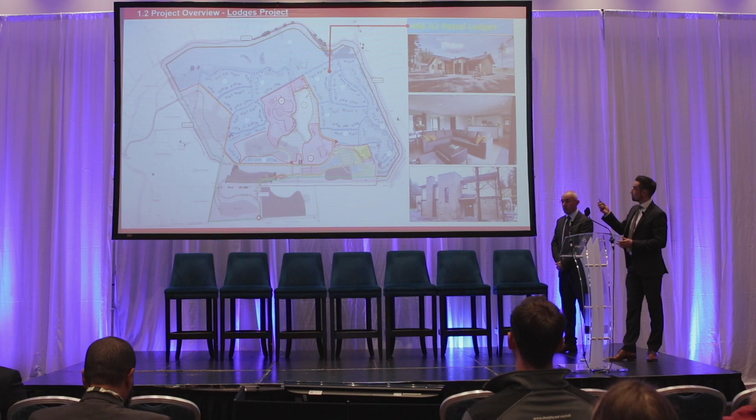First of all, the lodges project. As I said, there was 466 lodges, and lodges probably doesn't do them justice - they're high-end units, A2 rated, high spec, nice and spacious. There's a variety of different levels, from 2-bed woodlands right up to exclusives. On the right hand side shows some of the interior shots.

So in terms of numbers, what did this part of the project entail? There were 466 of them, a huge amount of materials to be delivered, huge amount of coordination in a woodland. You say 400 acres, you think there's a lot of space, but there was actually very little space inside because the wood was just pockets taken out for the building.

There was 300 kilometres of timber cladding, that's from here to London. There was 4.2 kilometres of lodges - if you were driving along in terrace housing, you'd be driving for 4.2 kilometres of housing. And this all had to be delivered in 68 weeks. There were 4,600 doors, 3,200 windows. So a massive amount of logistics and coordination needed.

Rate of production was 3 lodges per day, so each trade had to meet a very simple KPI of 3 of everything. For example, 3 timber frames had to go up, 3 lodges had to be roofed a day, 3 lodges had to have the mechanical and electrical fitted out a day. There was rapid production right through the job, like a cycle, and if that got knocked off, the project was going to be in serious trouble. So again, the digital side, the innovation, the informed decision making allowed us to meet those targets.

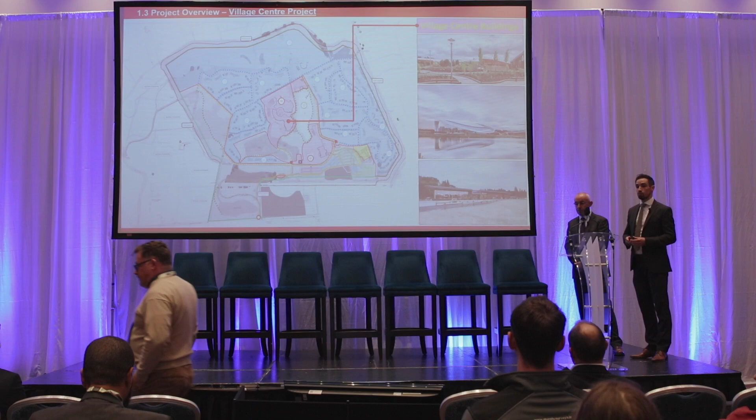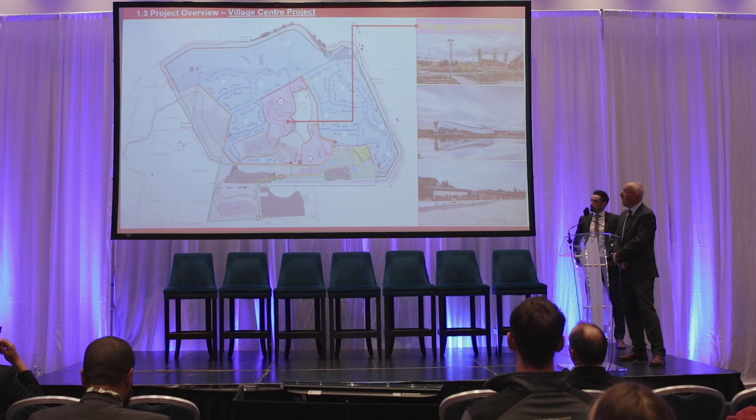In tandem with the lodges project that the lads were delivering, the other project we had was a village centre project. The village centre was 9 commercial buildings around the man-made lake that had been built in the middle there.

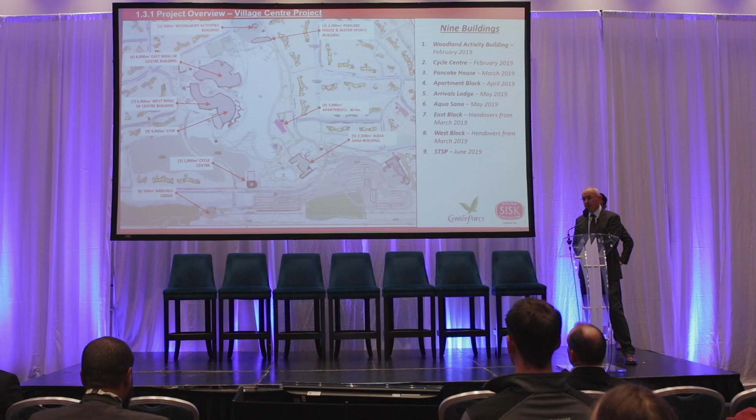Our site was much more condensed than the site that the lads had on the lodges. The lads were looking at maybe 200 acres of construction work right through the forest. We had about 30 acres concentrated around the lake, and 9 separate commercial buildings.

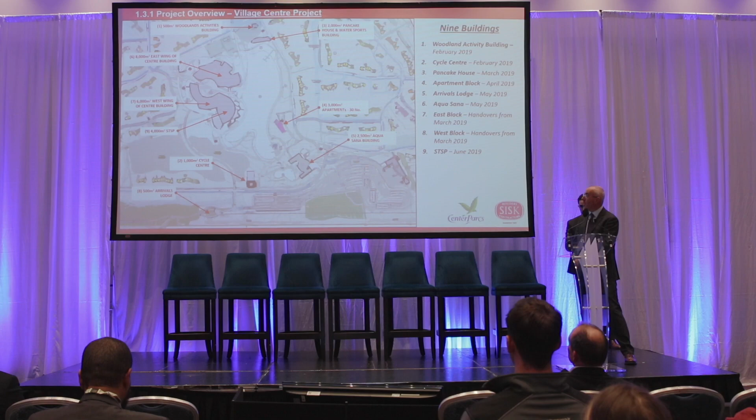2 at the top of the lake, the Woodland Activity Building and the Pancake House, an apartment block, and an Aqua Sana, which is 2,500 square metres of a health spa at the south of the lake, a cycle centre for 2,500 bikes, and then we had a village centre itself on the left of the lake - the east wing was 2 acres, the west wing was 1.5 acres, and behind the west wing was the subtropical swimming paradise.

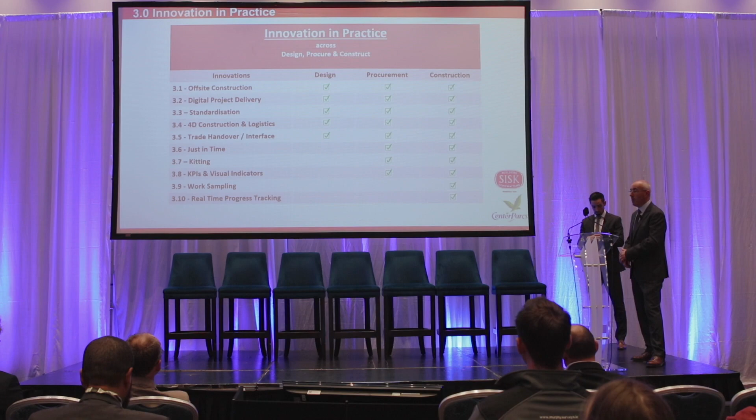Given the tight timescale and budget we had, we didn't have time to do things 3 or 4 or 5 times. They had to be done right the first time, and there was a huge amount of coordination needed. So I'll just hand over to Brian.

Okay, thanks James. So that gives you a feel for the challenge we had. At the start of the job, as I said, it was 2 projects. We had to first show ourselves that we could deliver 2 projects in 76 weeks, then demonstrate to the client that we could do it, and then actually deliver it.

There was a couple of stages, but it was a design and build project, so we had to make the client's concept design work in Ireland from a building regulation point of view. So we had to design, procure, and construct.

We used 10 summary items from a digital and innovation point of view, off-site construction being the first one. So what did we do from an off-site construction point of view?

This obviously has to start at design stage and right through to construction. There were 3 key things, and a lot of smaller elements, but these are the 3 key things we did. The subtropical swimming paradise, as James said, was a glulam structure, a large timber structure, but it had a lot of structural steel in the roof.

That was going to slow down the install, the procurement, and the off-site production. So we looked at innovative solutions: cross-laminated timber, coordinated with the glulam beams, fully modelled to be coordinated with all the services within the building. We delivered that, reduced 480 tonnes of steel, gave a saving to the client, and reduced time.

We did similar with the 466 lodges. They were all manufactured off-site in a warehouse in Derry, delivered to site in panels and trusses and erected. BIM allowed us to do that, so we were able to coordinate each of them prior to install on site. Once they came to site, it had to be like Lego blocks right through.

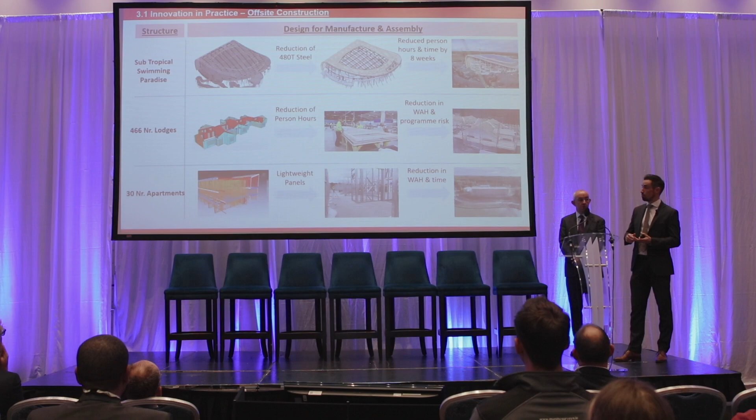Then the final part was the 30 apartments, a lightweight structural steel panel. Interestingly, since Center Parcs, we've actually acquired a company that now manufactures these off-site, Vision Built, here in Galway.

So it's a great new part of our business, and we delivered them 30 apartments using that system.

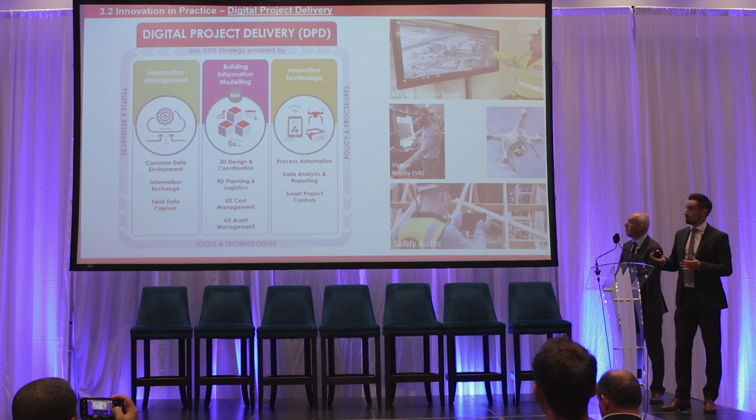The second part is obviously digital project delivery. People will be familiar with how SISK deliver in terms of our digital side of things. We have information management, building information modelling, and innovative technology.

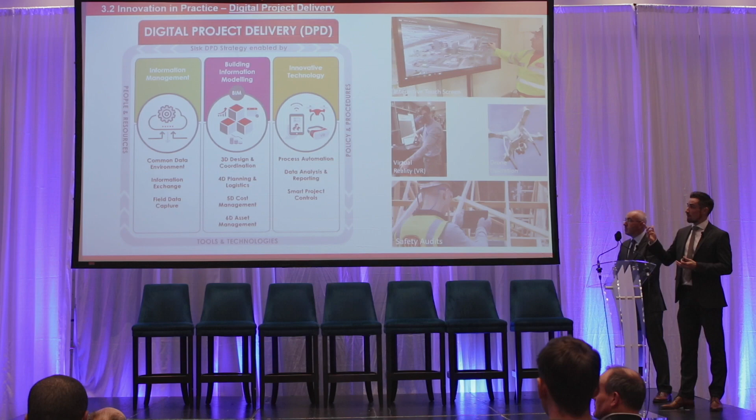These are the three strands we utilise to manage and coordinate our construction on site - the common data environment, the field capture tools that we use. There's a small video showing how our team at the end actually use these on site, and it's quite interesting to get the commentary back from the guys using it out in the field.

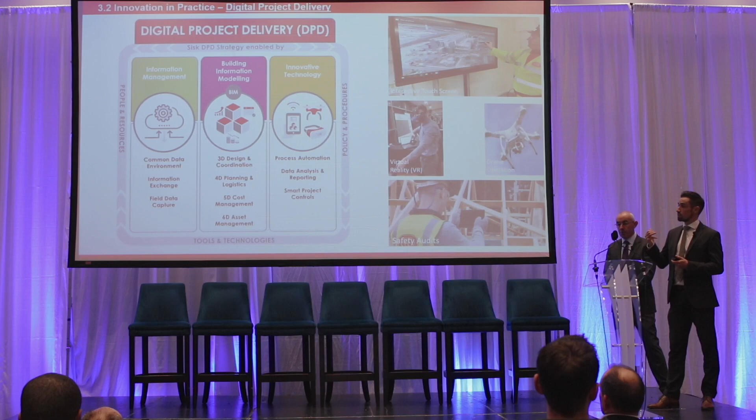Virtual reality, drone operation, 4D construction sequencing - all allowed us to manufacture off-site, deliver on time, and coordinate all that activity.

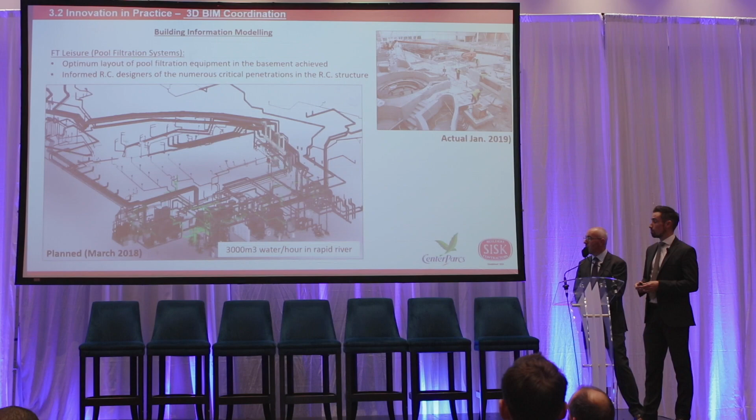Again, FT Leisure was the pool filtration system. There were 6 systems - one of them produces 3,000 metres cubed of water per hour in a rapid river. The coordination of this with the substructure was critical, so BIM helped us all here.

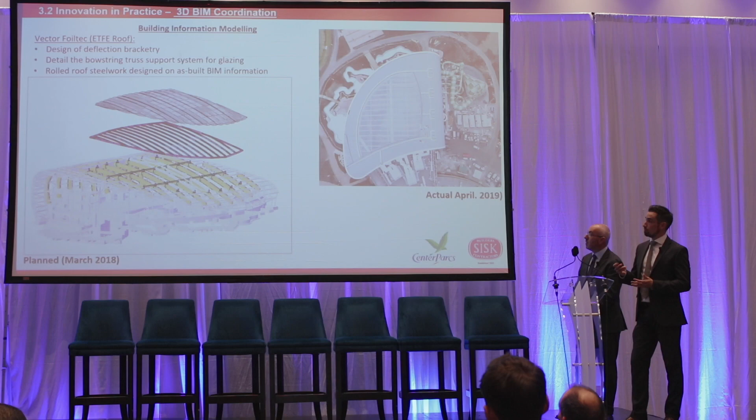And the final one for the main centre village is the ETFE roof light - again, a key coordination part of the project.

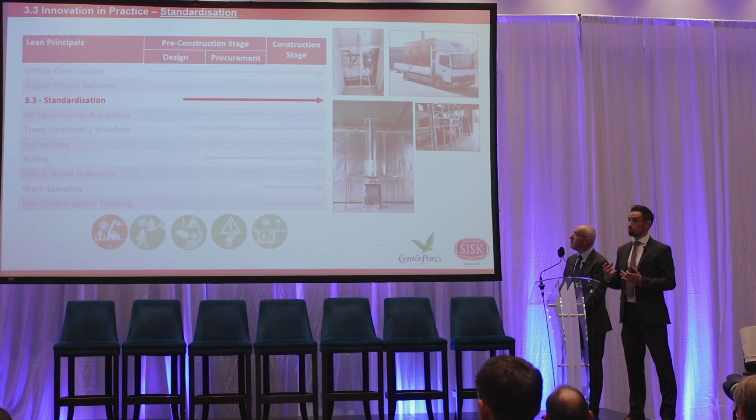So the next step is, how do we make ourselves lean and efficient when we're getting such repetition of lodges? Standardization is one thing - you look at simple details, simplifying them, making sure everyone knows what's required in terms of quality, and then you just repeat. That was a key part of the build as well.

The 4D construction sequence - there's a SISK stand out here this morning showing a lot of how we utilise 4D for various projects, and going forward we use 4D on all of our projects. At tender stage particularly, it identified how we were going to logistically build 466 lodges through 400 acres.

At the start of the tender period, we actually got the logistics wrong, but we were able to sort that out through 4D construction sequencing at tender stage, and we were able to demonstrate to the client our steps in getting to the right solution.

For the centre buildings, we were always able to capture it with drone footage and compare that back to the 4D construction sequence at any one time, so it gave us a feel for if we're ahead, behind, and what we needed to focus on.

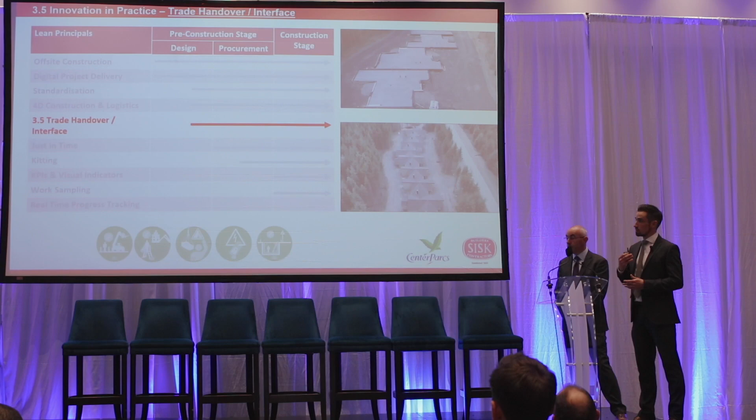Trade handover interface - this was part of lean construction again, just having very simple, clear, concise handovers between trades, keeping the site clean and making sure quality control and safety were always top of the list.

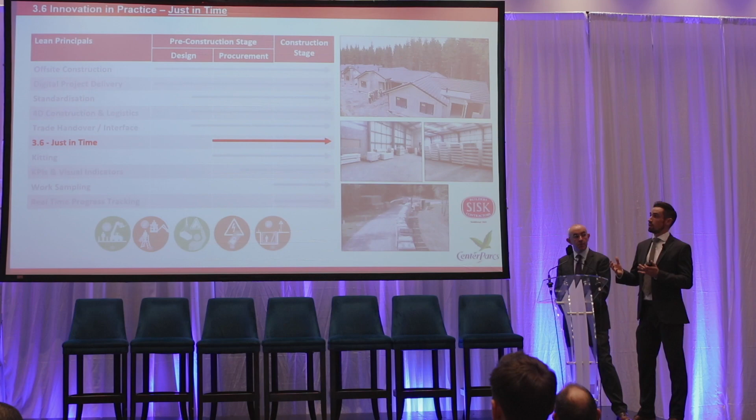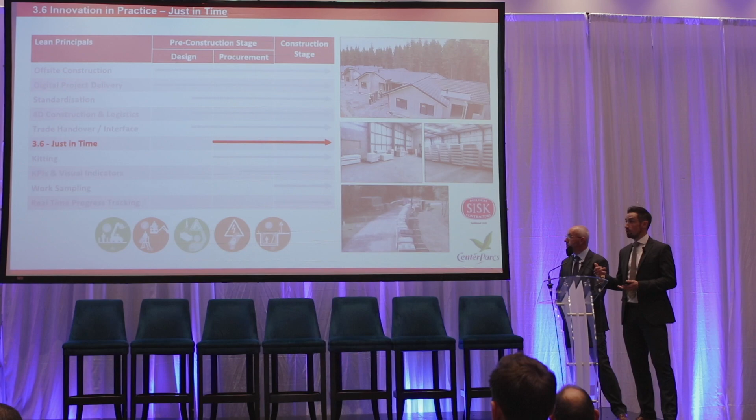Just-in-time delivery in Ireland doesn't always work - you're bringing stuff across on boats from various parts of Europe and the world. So we looked at off-site warehousing around Ballymahon, and we rented accommodation to store some material. Some came in right to the final location, and some were stored in this warehouse.

A variety of techniques. Kitting was very interesting because again, repetition - we were able to kit, IKEA style, all the pieces of the lodges and then repeat that, so the guys knew at any point in time where they were in terms of materials, quantities and specification.

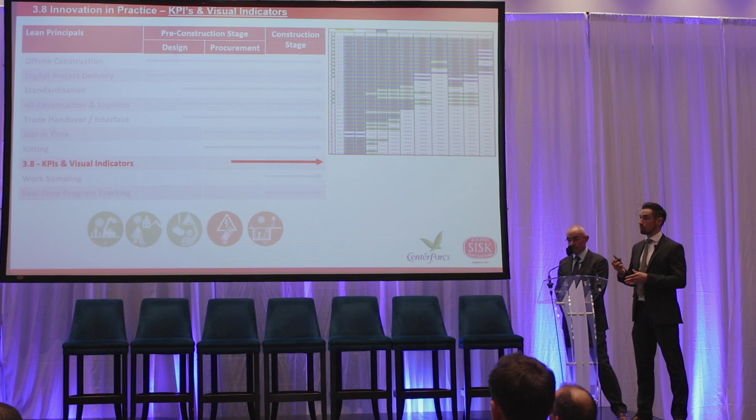Very simple KPIs - rather than bar charts for the lodges, we actually brought it right back to tabular information like this, and you could see very quickly where your problems were in green, blue and red to identify any lags or issues on program.

The ninth one is work sampling - again, a lean principle we used. This involved identifying and watching trades as they were building to understand where the problems were as they built. This included a couple of weeks where we had guys actually monitoring the works and reporting, calculating the wasted time, calculating the value add, and then trying to get those problems out of the way.

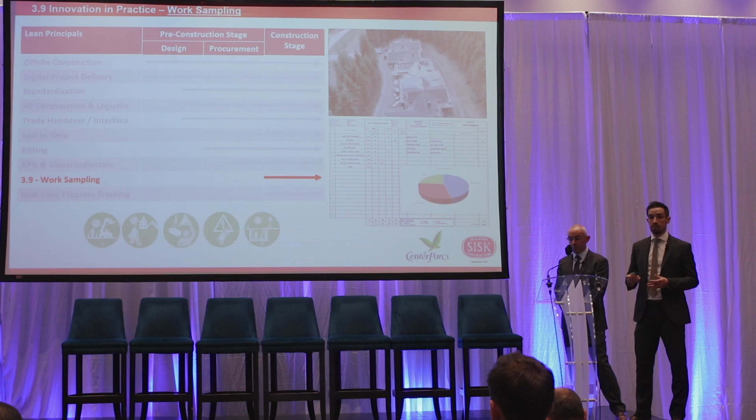That just shows we'd a problem with the roofing at the start, and we were using 57 man hours, or person hours, and we had to reduce that to come back in on budget. We got it back by work sampling, by getting rid of some awkward details and just making sure the logistics was right.

The final one, which is a very interesting one, is the real-time progress tracking. It's just an app we use and we sync it up to our program, so all the people in the field can monitor progress and put it into the app. It syncs automatically back to our master program, and again we were able to know in real time where the issues were.

Apologies for the acting, but we're going to show delivery.

We've used 4 key and particular tools, which have been 4D construction sequencing, building information modelling, Asta Progress mobile app, and Field View.

Field View is used as part of our quality sign-offs, environmental and safety auditing. The software works via an application that can be used on a tablet or on Android phone, so it enables us to do all our quality sign-offs out in the field without the need for paperwork and returning to the office.

From my experience on other projects, I can see a massive reduction in time spent using the paper format. Its ability to raise tasks and its ease of raising tasks with multiple contractors should have added benefits on a traditional building site.